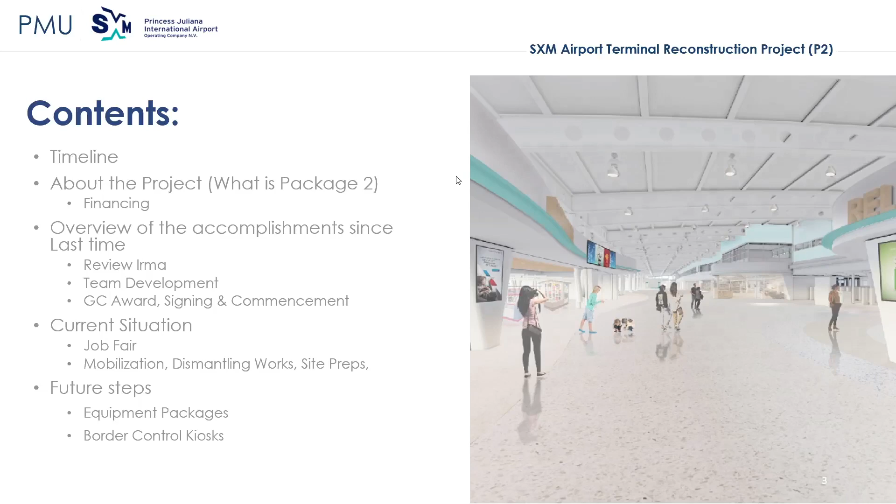And one of the most important ones is the stakeholder engagement plan, which is why we are having these public outreach campaigns, where we have the opportunity to engage with all our stakeholders, not just those at the airport, but those also on the islands, those who are utilizing the airport, so we have the opportunity to update you on what's going on and give you the opportunity to also let us know what you would like changed, if there's any kind of concerns or grievances.

Again, that's the grievance redress mechanism, one of the components that we have within the ESS package. This grievance redress mechanism is about you being able to submit any kind of complaints about the project. We know there are certain folks that may have issues we may not know about, and we could tweak and make things better. Only with you coming up with your complaints or suggestions do we know what you're thinking, and we can be able to address them. There are numerous ways of you doing that.

You can go online to the sxmairport.com page. You can email us - our email address is p2projects at sxmairport.com. There's a drop box within the airport, and you can even give a call to the airport, and they will take that information, drop it across to us, and we will be able to address a lot of your concerns.

At this point, I'd like to take the opportunity to just quickly go through the video that gives an understanding of what the project is into.

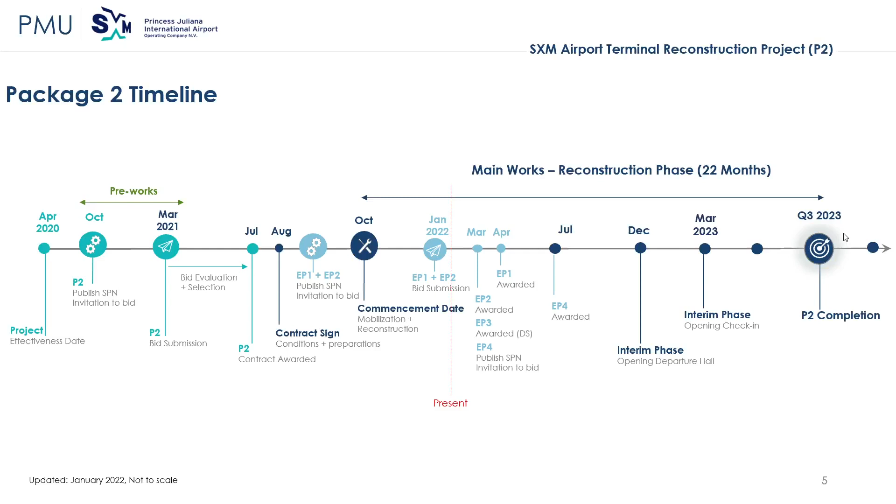Up to the departure level, you go through security screening, and then we go through the electronic gates, e-gates, which is immigration on the way out into the departure hall.

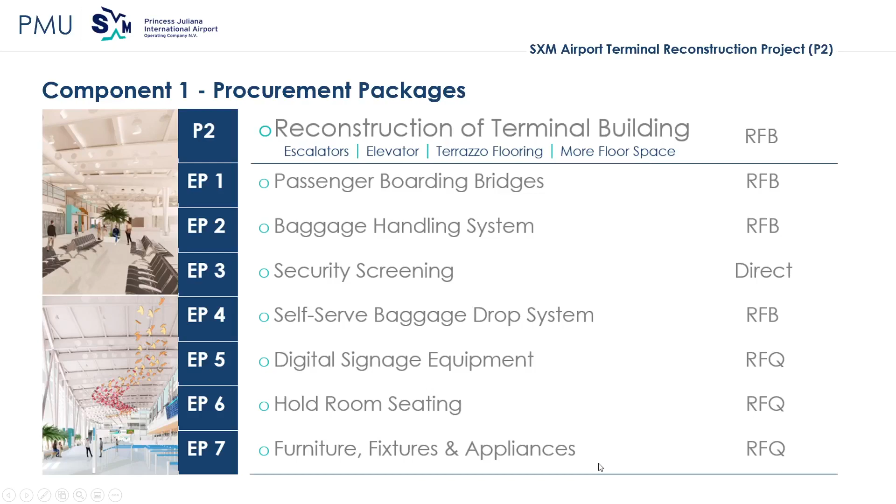We're going to be incorporating a lot of lights in the building, a lot of glass, so that we can have the natural lighting coming through. The restrooms are being redesigned.

Beacons, nice wayfinding, modern look. Even the elevator that we had on this floor is going to be modified into a glass elevator to allow more lighting in. The executive lounge, which is also a business class lounge, has been modified with now two levels.

We have relocated the gate that was on this side of the terminal. We moved it a little bit more over to the corner so we can maximize on the use of retail on this particular level. For those who have known the airport very well, this was a bit sterile, so we now have a bar that's going to be also available at the A1, A2 area.

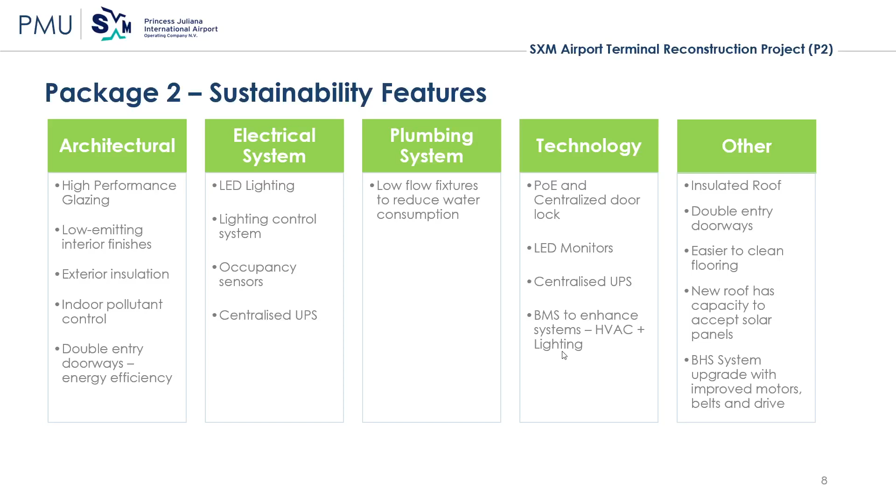Once you're in the arrival corridor, we'll be utilizing our automatic border control kiosk, something like the ESTA, where you'll be able to go through immigration using these systems. Some folks may still have to go through the manual process, but once you pass immigration on the way in, you go down the stairs where you'll be now in our reclaim location.

As you're departing from the reclaim to the meet and greet location, before you meet your family and friends, you'll be passing through the car rental location, where we mentioned that we had discussions with the car rentals to be able to bring them a bit closer to the arrival segment.

Once you pass through where the car rentals are going to be located, you'll be in the meet and greet where you meet your friends and family. As you again will be greeted with the flight information displays in this location, our reception, and where the car rentals were before Irma is going to be transitioned into a nice bar.

All of this, we expect to have completed by 2023.

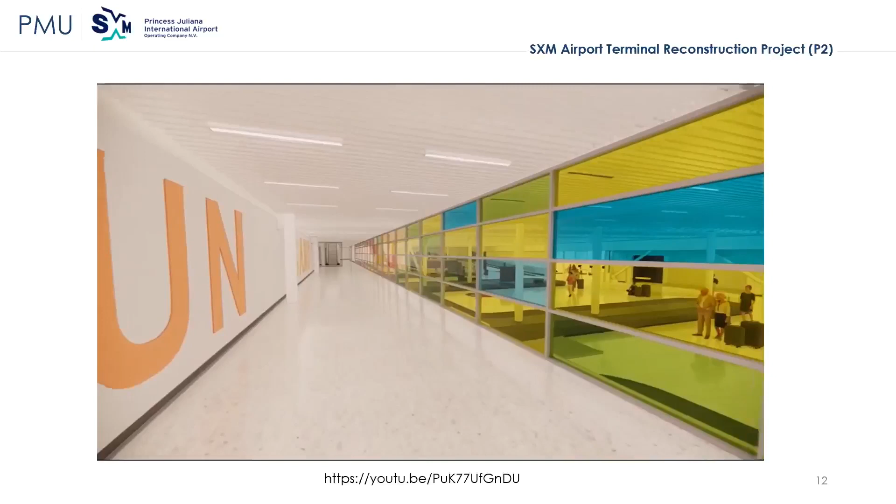So in our discussions with the government of St. Maarten, they were able to make $72 million available via a grant to the airport. $50 million, as I mentioned before, was for the reconstruction, and $21 million was for the operation expense and liquidity support component four. When that came to fruition, the European Investment Bank also matched that with $50 million for the construction project.

So the European Investment Bank gave St. Maarten's government a loan of 50 million. We got a grant of 72 million out of the trust fund, and they gave it to the airport as an on-lending agreement, 122 million, via the National Recovery Program Bureau. With this, the airport put their 7 million together, making the whole project a $129 million project.

Because the World Bank was put to manage the trust fund monies, they automatically implemented and are also managing how the airport is able to implement this particular project. The European Investment Bank, seeing that the World Bank is already managing, did not put anyone else to oversee it. They are authorizing the World Bank to work in their interests.

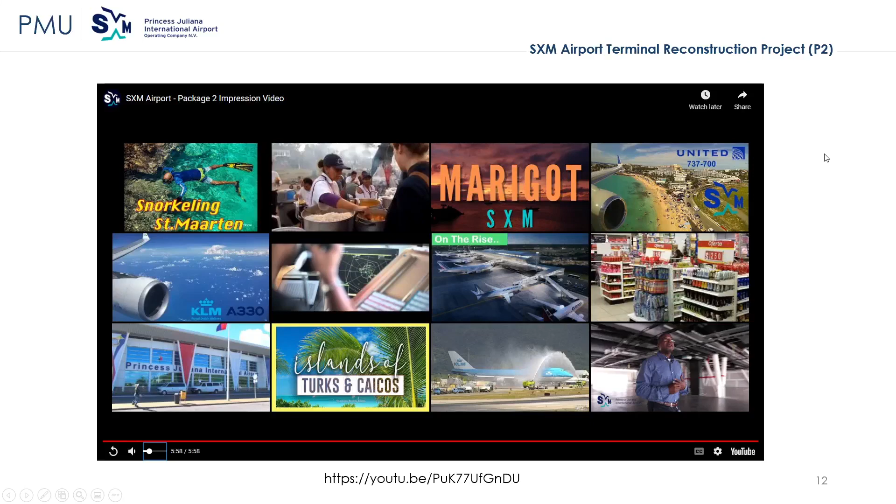When we had our arbitration and received the money from the insurance, we could not just jump up and use that money back. A lot of it was allocated for work that needed to be done on the project.

We had the sprinkler system that needed to be done. We had the mold remediation project, the demolition and waste disposal. All of this came out of the monies from the insurance. The architectural work for the designers, third party support, the lawyer fees and stuff like that. The supervising engineer, the liaison between us and the contractor, is also being paid out of this insurance money.

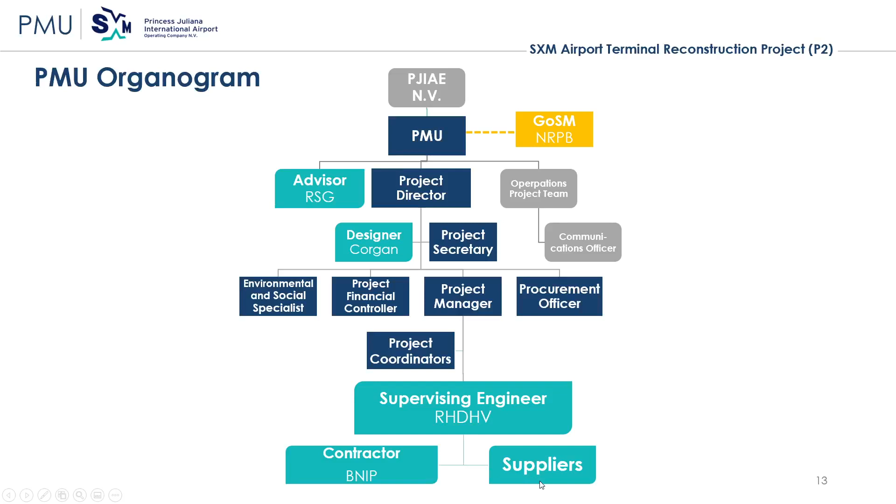So just a quick recap on what happened after the hurricane. In 2017, we had Irma, and Maria not too long after. In October 2017, we started our commercial flights. By November, we could start with night flights.

We had pavilions that we constructed - these were large tents with air conditioning. We started our roof repair in March, and right around that time is when we figured out we didn't have the money from the insurance anymore because we were in arbitration with the insurance company.

We were able to continue with package one, remediation, the construction, and by the end of 2018 we were able to move into the terminal. A new CEO came in 2019.

Package one, we had the supervising engineer now on board. The mold remediation was carried out. By March 2021 is when the bids came in.

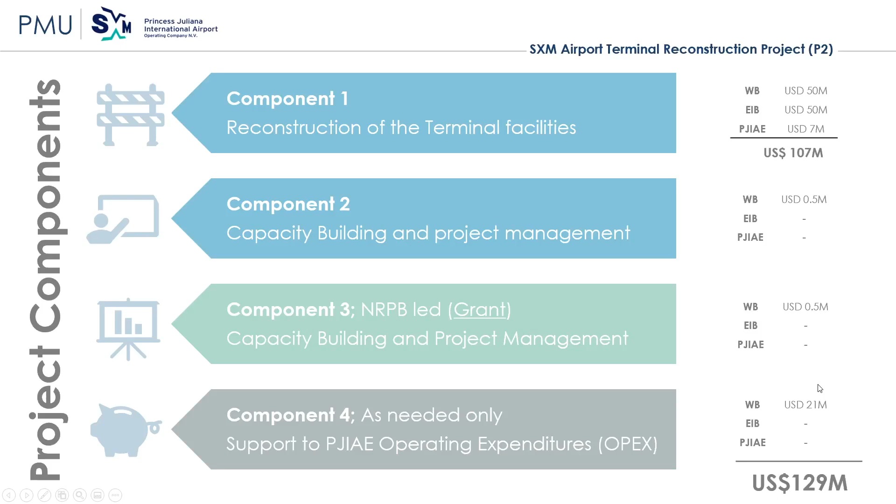So what has happened since then? The contractor has been able to bring their key personnel onto the project.

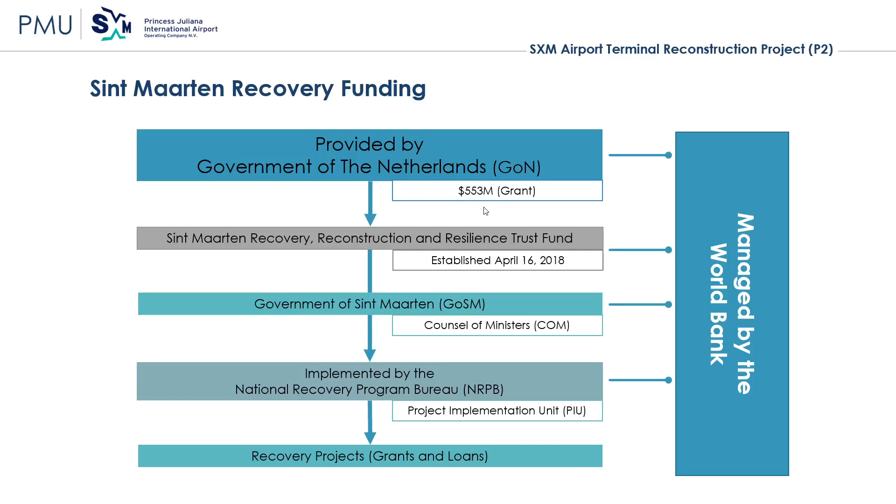They're double checking and doing their site surveying and project planning, because as I mentioned before, they did not physically see the terminal when they bid it. Now that they're on site, they needed to verify all of the drawings and scope of work, and ensure that any questions or clarifications required got the opportunity to be worked out.

There was a lot of security fencing because we needed to ensure that airport operations continue. They put up their site office and signage throughout, and they're now working on providing us shop drawings moving forward with their submittals.

They have hired security firms and waste management, and explained to us exactly how they're going to get rid of all the waste. In December 2021, there was a job fair where over 300 persons came to the airport, and hopefully we'll have about 150 to 200 of them participating in the project.

Presently, the contractor is carrying out dismantling works throughout the building. Every time they need to do something, a job hazard analysis is required - they need to explain to us as well as the supervising engineer how they're going to carry out this particular work without impacting operations within the building. So there's a lot of documentation, double checking and triple checking to ensure we do not hamper operations as it goes forward.

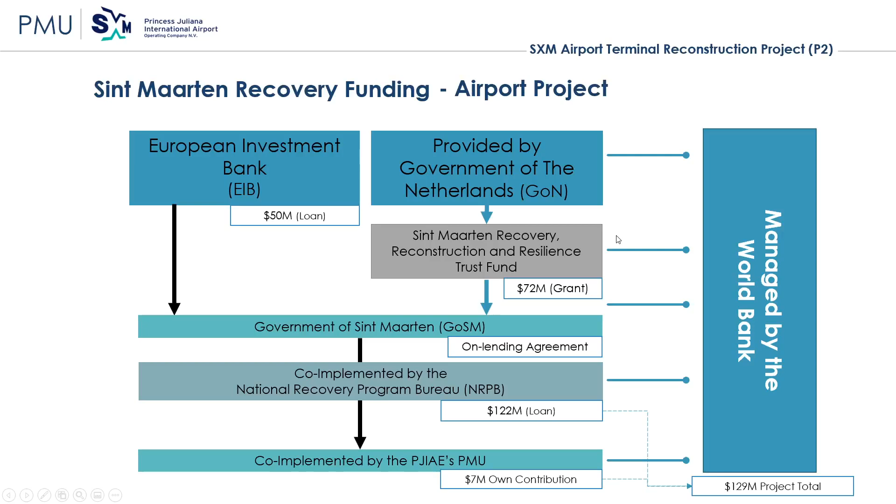And of course, upcoming milestones will be the equipment packages. We're also doing the e-gates that are going to be coming back as well.

As I mentioned, equipment packages number 1 and 2 came in already. We had 3 bids ranging from 2.8 to $4 million for the passenger boarding bridges. And EP2, which is the baggage handling system, the bids ranged from $5 million to $18 million, also 3 bids. Hopefully within the next month we'll be able to let everyone know who was chosen to carry out these 2 supplies.

So just a quick recap: the airport is operational, but we will be phasing it as we go.

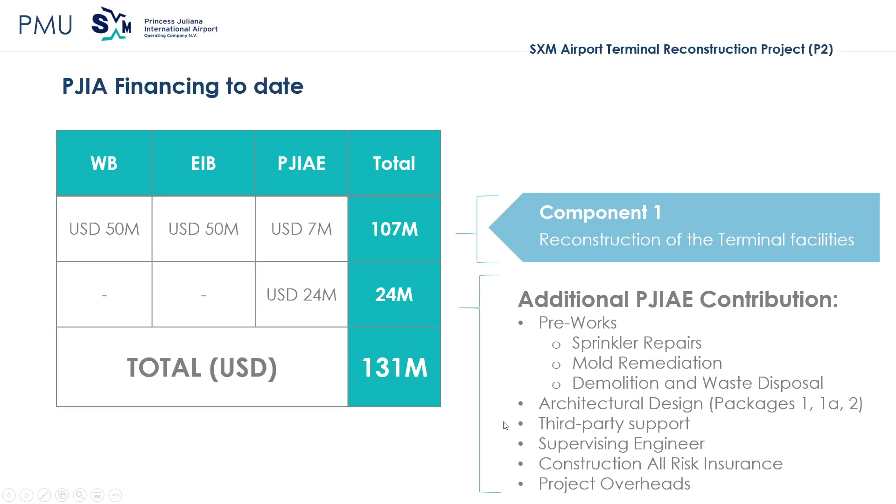The financing is secured. The World Bank has ensured that the financing is in place. The airport also has that money, with $7 million in a particular bank being used for this project. We are going to keep you guys updated as much as possible.

We have planned public outreach campaigns where we'll be going into the other facilities. So keep your eyes out on the newspapers for when we will be in your locations so we can have physical discussions with you on the project.

Mold remediation, the pre-works was carried out already. The waste disposal was done. The contractor is on board, and yes, the work has started.

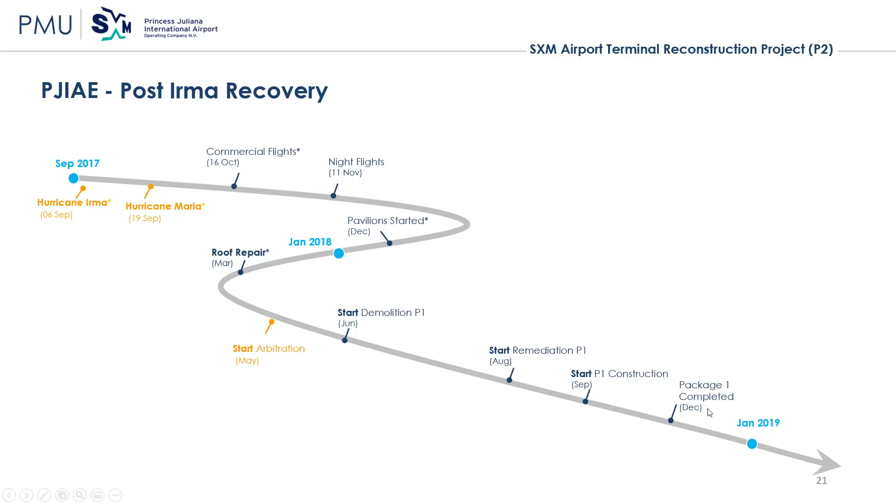Questions can always be emailed to us and let us know what you think of the project. There's also a survey we had where we gathered quite a number of concerns that passengers had, and some concerns the airlines had, and we are addressing those as we go.